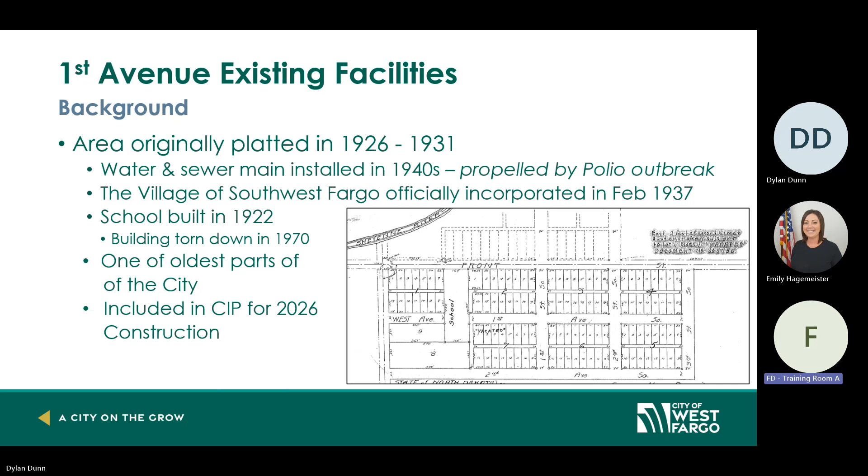The school that was on First Avenue was built in 1922. It's since been torn down, the Lydell Center is there now. It's one of the oldest parts of town, and it's included for the CIP in 2026 construction. So that's what we're preparing for.

As far as the water distribution, it's asbestos cement pipe, ACP, which typically has a life cycle of 50 to 60 years. We're currently like 74-ish on the low side. It's safe while in use, but it's harmful when it's cut, and that typically happens when there's breaks and repairs. Those breaks cause a disruption in the water main service and can impact the structural integrity of the roadway. Water under the road is a bad deal, especially when it's constantly flowing.

Fire hydrants, curb stops, water services and gate valves have all reached the end of their useful life. They're about 40 to 50 years old and require replacement. Also, during our study, we found that the hydrant coverage, the area that a fire hydrant can service, had a few gaps in the coverage, so needed improvements as well.

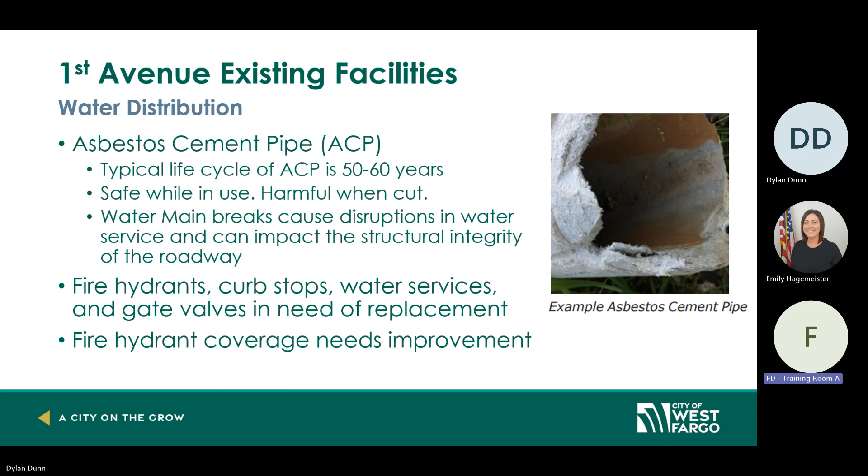Sanitary sewer, there is no sanitary sewer main under First Avenue, they're all in the alleys to the north and south. Those alleys were relined in 2024 under project 1348. There's a segment between 4th and 2nd that was not able to be relined, there's constant flow out of a lift station on 4th that couldn't be turned off long enough to be able to reline that. So that's one of the parts of the project we'll look at in a minute.

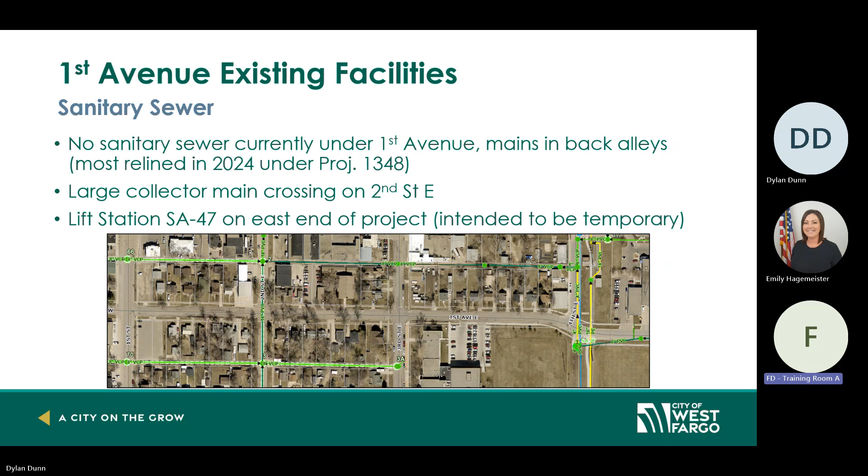There's a large collector main running north-south on 2nd, that's an 18-inch main running north all the way up to the lagoons. Lift station SA47 on the far east side of the project was intended to be temporary, installed in 2018 under 3001. So the intention was for that to be temporary, and this project would continue that gravity line to the collector main.

Storm sewer, there's a portion of the storm sewer mains that are in great condition and would remain in place, and others are undersized. Shown here is 12-inch, some 8-inch, 10-inch RCP, reinforced concrete pipe, and PVC. The minimum size is 15 inches for flow reasons. Most curb inlets and pipes are inefficient and undersized, we would look into upsizing those.

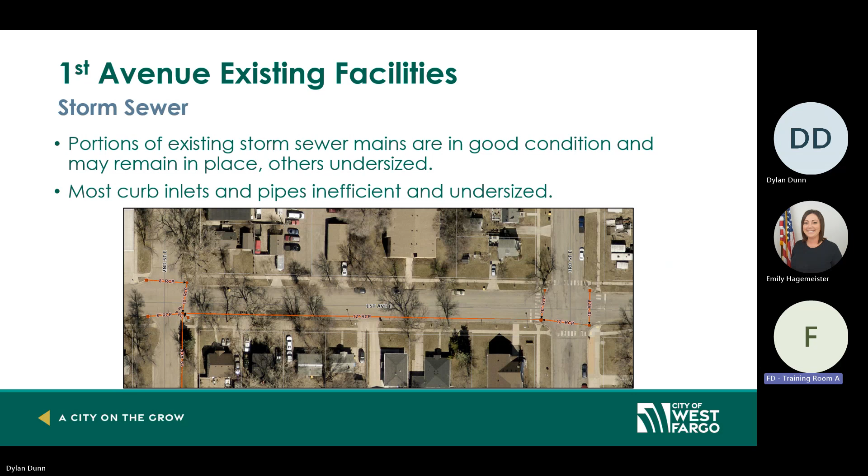And the roadway, you can see from the images and in any site visit, that the road is in some tough shape.

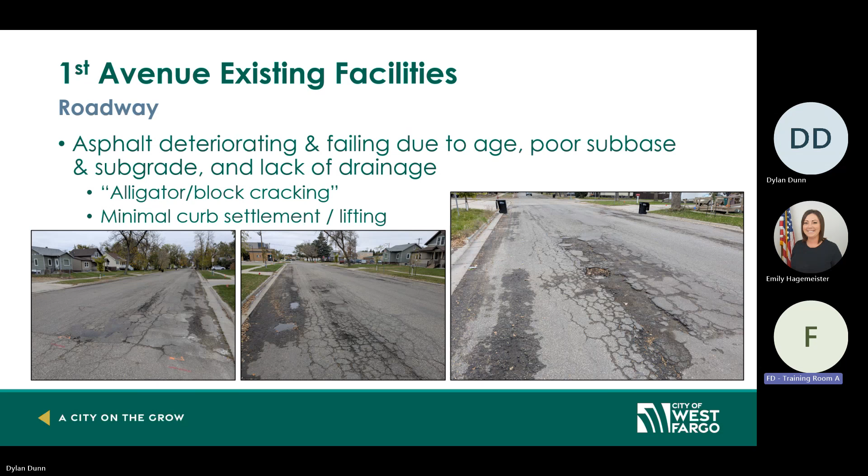The asphalt's deteriorating, failing due to age, it's fairly old, along with poor subbase and subgrade and a lack of subsurface drainage. There's alligator cracking, as we can see in the pictures, some potholes with some minor curb settlement and/or lifting, which is fine for leaving in place.

Sidewalks are also an issue. There's some faulting sidewalks, mostly due to tree roots. As you can see in the pictures on the left, it's a tripping hazard, and on the right is a fairly significant fault from the adjacent tree, roots pushing up. And lastly, in the middle is an out of compliance curb ramp.

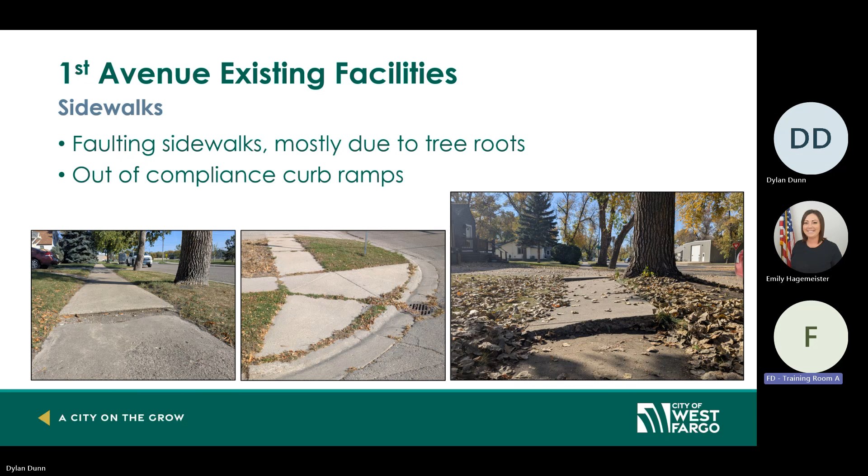There's ADA compliance issues - this is missing a lot of the things required to be in compliance for wheelchair accessibility. So this study recommended a few things that are up on the screen here.

Replace the water distribution system from right of way to right of way, including the main, services, and hydrants, upsizing the storm sewer to meet the minimum sizes, 15-inch, and decommissioning that SA 47 lift station and extending that gravity sanitary sewer to the main collector on 2nd.

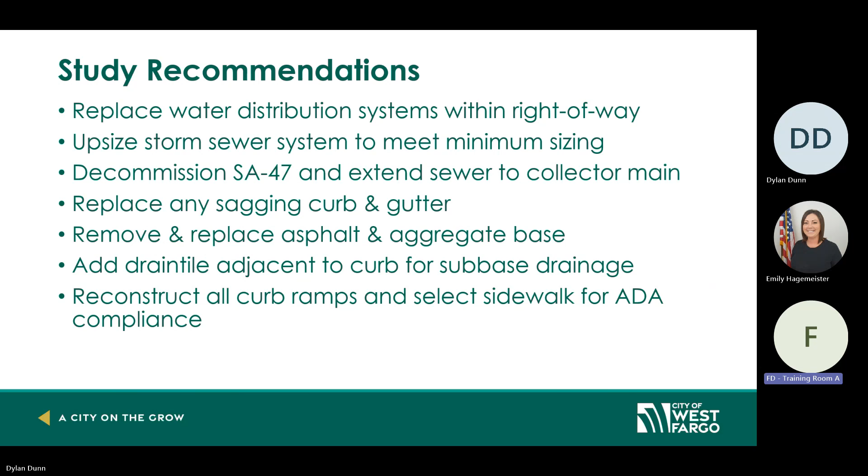Replacing any sagging curb and gutter, removing and replacing the asphalt and aggregate base underneath. Add drain tile adjacent to the curb for sub-base drainage that helps preserve the life of the pavement. And lastly, reconstruct all curb ramps and selected sidewalks for ADA compliance.

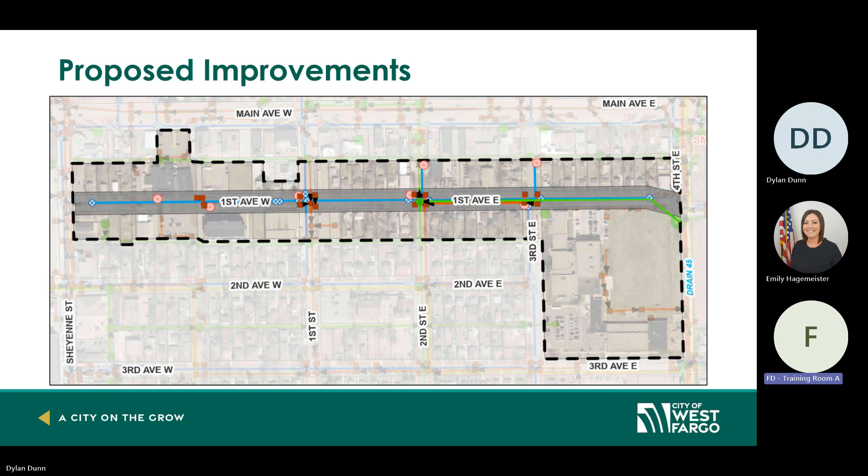So this is more of a visual to show the underground improvements - water main throughout, sanitary sewer from 4th to 2nd, and upsizing most of the storm sewer, mostly at the intersections. Different colors: green is the sanitary sewer, blue is water main, and red is the storm sewer.

So as far as construction, obviously it's impactful. We're going to try to make it as least impactful as possible, but still get the work completed.

So a few of the things in the phasing items include temporary construction easements for replacing water service or potentially a sidewalk, and we'll work with those directly affected landowners for that.

Temporary water service - we will set up water before the project and backfeed homes from a hydrant, a front spigot in the front of the house. This is a picture of a temporary water service that's laid out in the boulevard and will eventually be connected to homes.

Garbage, mail, and emergency services - we will notify them that this project is happening, what phase is happening, coordinate access, reach out to all those parties so they're aware of the project, and we'll work through the project as it moves phase to phase.

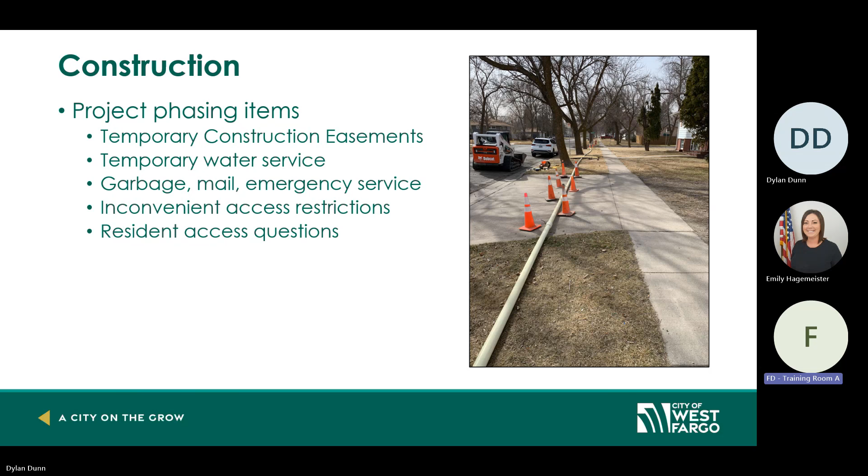It's going to be inconvenient for a while when the road is shut down. Fortunately, there are back alleys and garages, so it's not nearly as impactful as if this was your only access to your front yard - there are some situations like that. We'll work through that access and handle any resident access questions as they arise.

As mentioned, we're replacing the water services in front yards. We'll have to dig up that water service location to replace the curb stop - that's the little hexagon shape shown in red near the sidewalk.

We may also have to remove portions of the sidewalk if it's in the sidewalk or adjacent to it. Just as an FYI, that's the plan. Shown here is the removal of the water main, the services, and the sidewalk and asphalt street, shown in orange.

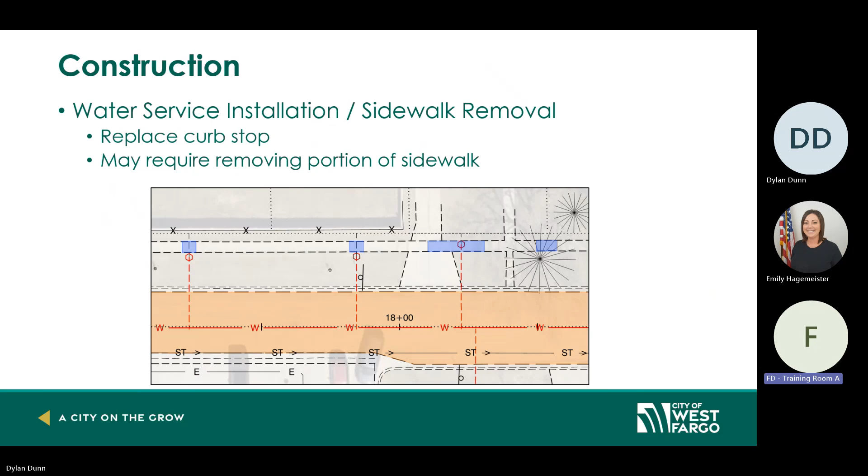We have a construction preliminary anticipated schedule. We're looking to start sometime in May once the frost is out of the ground and can start excavation and digging, and looking to end sometime in September.

There is a restriction around the Lodoen Community Center - the window that school is out. Summer school ends end of June, June 22nd, and school is back in session August 20th. So we're going to be respectful of that window to work in segment 3, shown in green.

This is an example phasing. Segment 1 is from the west to the east at the fire station, splitting that access to let the fire station out two doors to the east, then two doors to the west, flip-flopping from segment 2. Segment 3 is anticipated to finish up the high end of the sanitary sewer system.

Again, this is an example phasing. We'll work with the contractor to figure out exactly what the plan is to make sure they follow the rules and have access to everyone in the corridor.

This is a typical street section. As I mentioned, the curb is actually in pretty good shape - we're intending to leave that in place unless there are reasons it has sags or lifts. We'll remove the asphalt, install the underground utilities (water, sewer, storm), and add drain tile shown here right adjacent to the curb to soak in all the water that comes under the pavement and try to preserve that pavement.

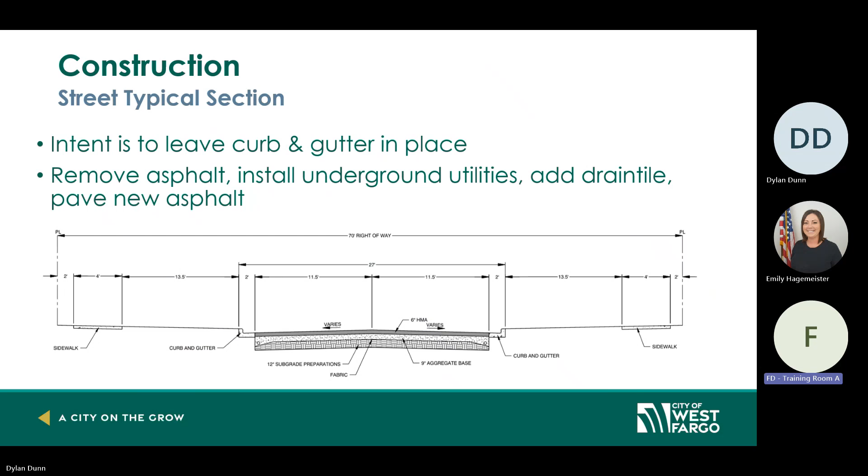Water is, I guess, the enemy of pavement, so to get that away as efficiently as possible is ideal. And lastly, pave that new asphalt within the curb section. With that, I'll pass it over to Matt to fund the project.

Thanks, Dylan. So that was a lot of information about infrastructure that's old, past its useful life, and has been studied and identified for replacement. With that comes a lot of costs, and the city has many projects that need to be prioritized across many departments. In order to best utilize available funding, they do it through a CIP, or capital improvement plan, to maintain all of the city's infrastructure.

This plan is used as a guidance document to plan appropriate projects in a particular year. It identifies particular funding sources and classifies infrastructure based on type. If we reference the current adopted city CIP, approved in August of 2024 by the City Commission, you can see that in 2026, First Avenue was identified as a priority project.

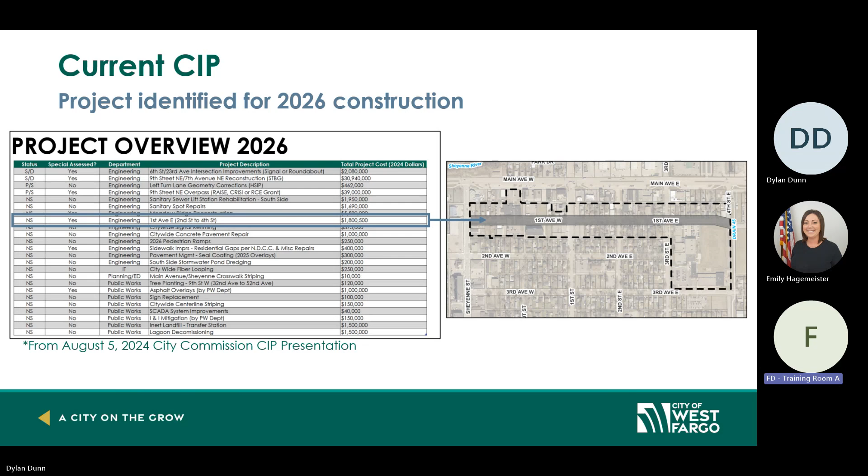This project is also identified as a local reconstruction project. From the funding policy outlined in that adopted 2024 CIP, the city would contribute 70% of the total project cost, with the remaining 30% being specially assessed to the benefiting property owners.

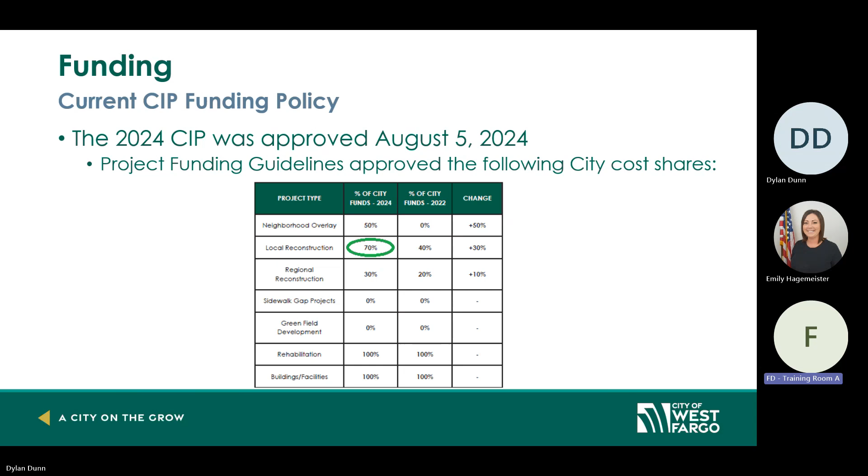When special assessments are identified as a funding source on a particular project, there's a set of North Dakota Century Code rules that need to be followed for the project process. The first step in that process is to create an improvement district map.

The improvement district for this corridor and project was created back in September. It outlines all the fronting properties of First Avenue identified to be associated with the project location. So we've identified this project in the city CIP, it has special assessments as part of the funding mechanism, and we create our improvement district.

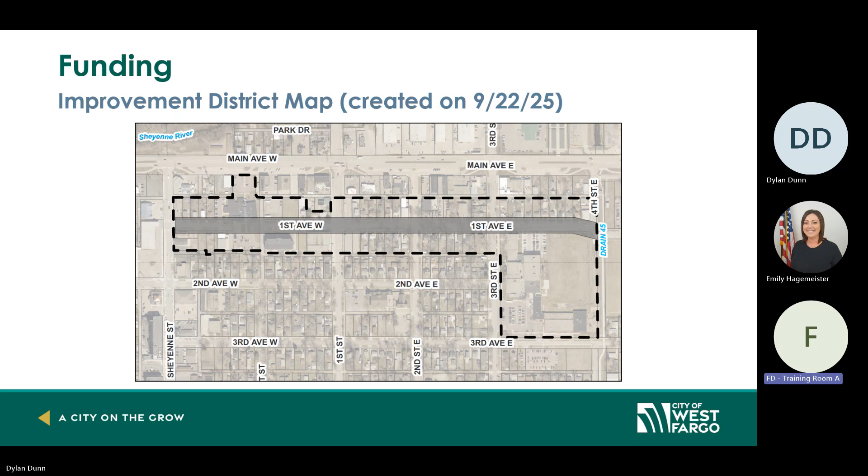Now we need to complete an engineer's report, the next step of the process. This engineer's report is a key step because it has a total project cost estimated with it as one of the final deliverables, in addition to all the information that Dylan laid out regarding the infrastructure.

This engineer's report was prepared for First Avenue. It came with a total project estimated cost of $3.86 million. That estimated cost included multiple items, including all the construction of the improvements that Dylan laid out in his proposed improvements, any city administrative costs, engineering costs, and other fees. It also included a 15% contingency on top of that, to account for some of the unknowns that may arise during the design and construction process.

One other item to note is there are minor sanitary improvements identified under this project. It was previously directed at a city commission meeting that the city would be funding all of those sanitary improvement costs, around the $400,000 mark.

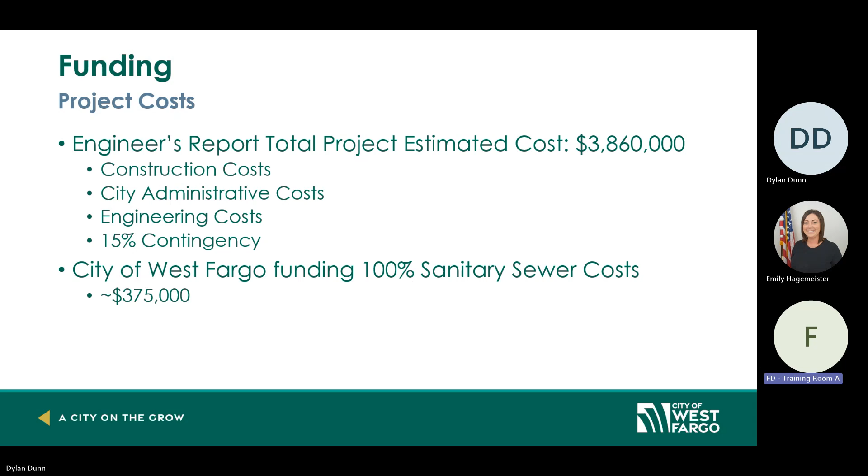So if we dive into those costs a little further, for the anticipated special assessments, applying that 70-30 split to our total estimated cost of around $3.86 million, there's about $1 million of assessed total that would be allocated to the benefiting parcels.

That's a range, quite a range, with the school parcel being on the high end and some other parcels on the low end. But that comes out to about an average assessment for all these benefiting parcels around $18,000. If you take off these outliers, that'd be about $16,000. So $16,000 to $18,000 on an average assessment.

If you want to think about that in a different way, on an assumed interest rate of 5% over a 25-year special assessment period, it's about $1,300 per year for those benefiting parcels.

One thing the city is trying to do to help buy down portions of this total project cost is applying for some grant funding. One identified grant is through the Department of Water Resources, and the city has already been successful in getting cost share approved for the design and study portions of this project.

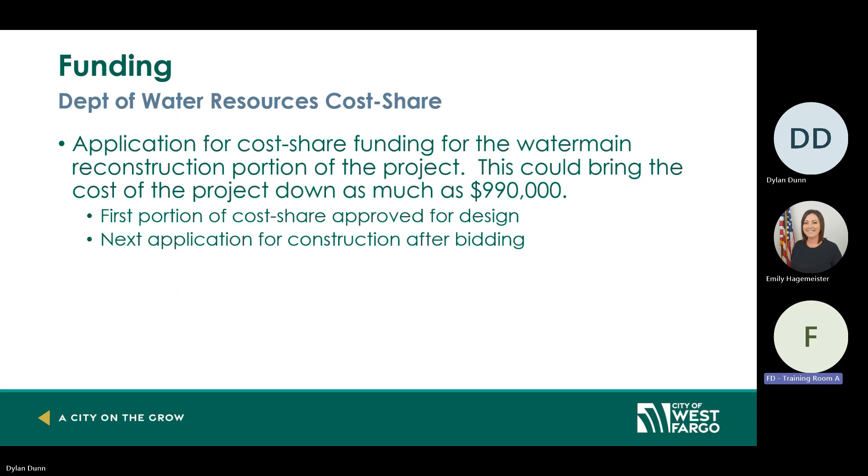This next slide illustrates how impactful that could be. Our total project cost used to be $3.86 million. If the city is successful in being awarded that grant opportunity, it could go down almost $1 million to that $2.8 million number. And if you come all the way down to the average assessment, we were between that $16,000 and $18,000 per parcel — that drops about $5,000 per benefiting parcel. That's very impactful for the overall project.

So that's kind of where we're at funding wise on the whole. If we step back to how we got to where we are today: the project has to be identified through city staff, and studies need to be done. As soon as the project's identified, it's put on the capital improvement plan. It can't go on that CIP without a funding source. If even 1% or 0.5% is going to be funded via special assessments, it goes down the special assessment route.

That's what we laid out tonight. We created our improvement district, prepared an engineer's report with a statement of probable cost, and the next step is to complete the plans and specs. Moore Engineering has been hired by the city to prepare plans and specifications. We're about 30-40% through that process right now, so by no means completed.

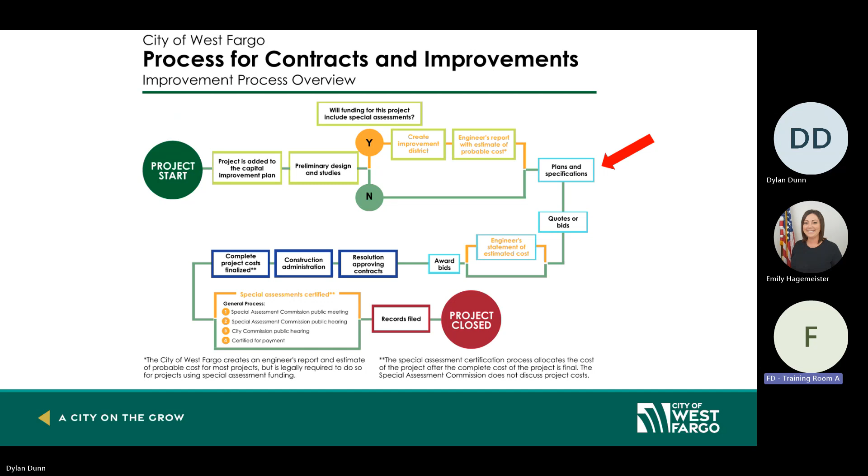That's kind of where we're at on a long project process - we're right in the middle right now. It's a lot of information for anybody listening or in attendance here. We talked review of what's out there today, recommendations from our study, the costs associated with improving this corridor, and where we're at in the overall project process from a city project perspective.

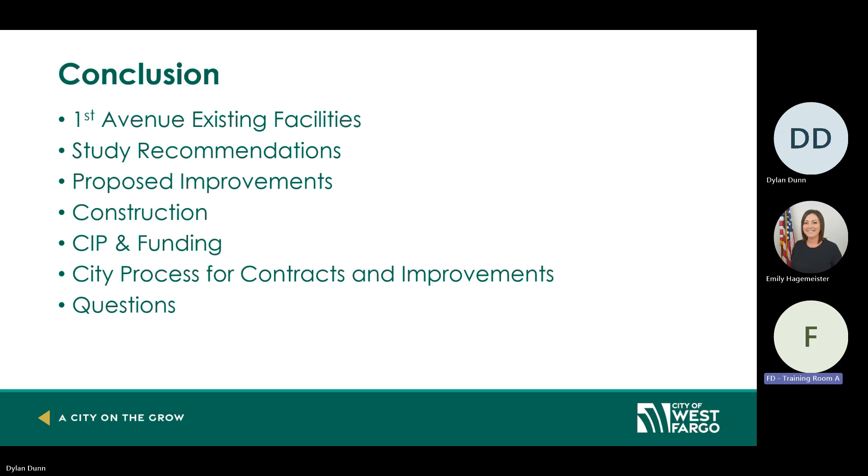Questions - talking to you, Dylan, you were going to mention you guys are talking about that today with the access to our doors on the north side of the building. Yeah, that's something that's going to be feasible. We think it'll be feasible to split that phase, segment 1 and segment 2 of the red and the blue, so we'd shut down segment 1 first, construct that, have you go out the 2 doors to the east. Then flip everything - kind of what we did when we replaced the concrete last summer.

That was like your driveway, yeah, we replaced all that. There may be a day where we need to do something when we're paving the road - we'll sneak you out to the east, maybe over the boulevard, and reconstruct that, or work out something for a day or two. So, yeah, absolutely - like our neighborhood reconstruction this summer, every week we're informing you guys and PD of our access restrictions, which hydrants are in service or not in service. That's a continual conversation with the contractor, making sure you guys are crystal clear on what needs to happen for emergency services.

I'm the neighbor to the north of the fire department, and that access on First Avenue is my only access to my garage. But I think during the half, east versus west, I think my driveway is wide enough where I could make that work.

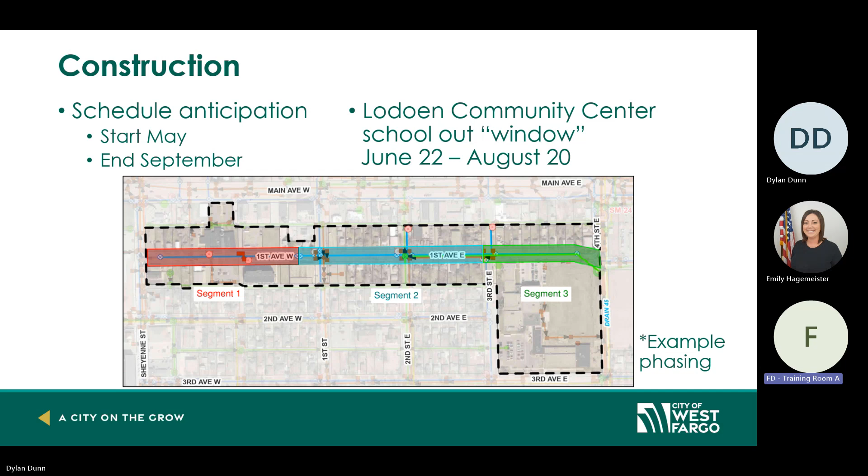There is a potential it increases as well, but with the city CIP, that's where they're trying to be as impactful as possible, fronting 70% of that bill. The other thing too is with the city going out for grant funding, they're very optimistic they'll be awarded potentially $1 million. So that number hopefully does slide down from $1,300 per year to potentially around $900 per year. I know that's not zero or $500 per year, but it's some things the city is trying to do to be cost conscientious.

They understand that this is a tough corridor. They also understand that if the infrastructure were to fail, an emergency fix is likely more costly. Before the 2024 CIP was adopted by the commission, the amount that would be assessed would have been 60% of the cost of the project. And the city basically said that we need to be able to get the specials cheaper than that, because people just simply can't afford 60% of the cost of the project - everything he's presenting here would have been doubled if it hadn't been for that decision by the commission.

The commission moved to fund 70% of the project with city funds and only assess the 30%. I say 'only' - that's subjective - but the 30% is half of what it was two years ago. And caveat that with, there's about $500 million worth of work to do in the core area alone by the time we reconstruct everything. I'm not even making that number up - it was $543 million worth of work to reconstruct the entire core area when we did core area master planning.

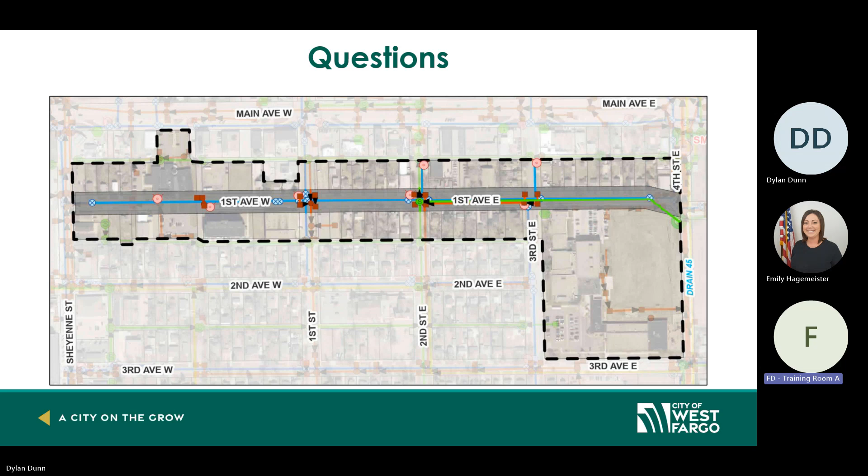And you can always get a hold of Jerry or I at City Hall as well. Any other questions or anything? If you have any other, we're happy to answer questions on the project.

One thing I'd like to reiterate is if we do eventually find ourselves moving forward with the project and into construction, one thing that worked really successfully on some of our previous reconstruction efforts was a weekly update—kind of a media blast we put out that showed what the work for the week was and what's to be expected in the coming week. I think we're planning on doing the same thing for this project as well.

We encourage anybody to provide their email address to get programmed into that communication as early as they can. But with that, thank you everybody for coming. We appreciate it. If you have any questions, feel free to reach out to us or the project team and we'll get you some answers.

Sounds good. Thank you. Yeah. Take your time.